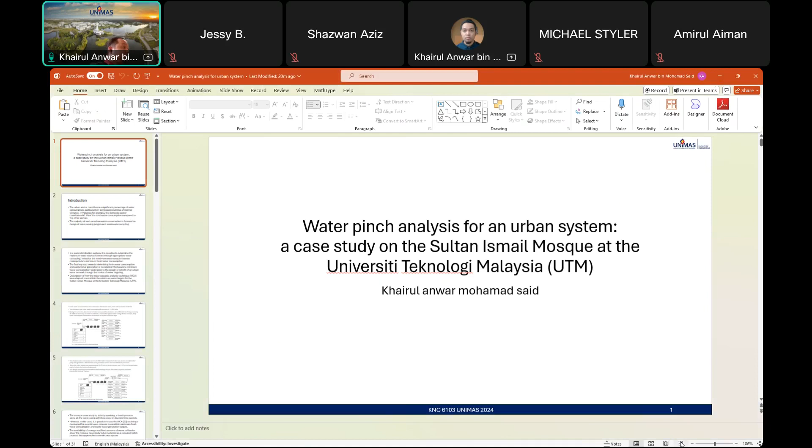The urban sector contributes a significant percentage of consumption, particularly in developed countries with warmer climates. Malaysia, for example, this is from page 2. In Malaysia, for example, the domestic sector contributes 60.1% of total water consumption.

The need for efficient water management in the urban sector is becoming ever more crucial due to a sharp increase in the price of fresh water. This trend is likely to continue in the near future due to predicted shortage of fresh water and hence the possibilities of resorting to wastewater treatment, desalination, groundwater extraction, and water purchases as well as transport.

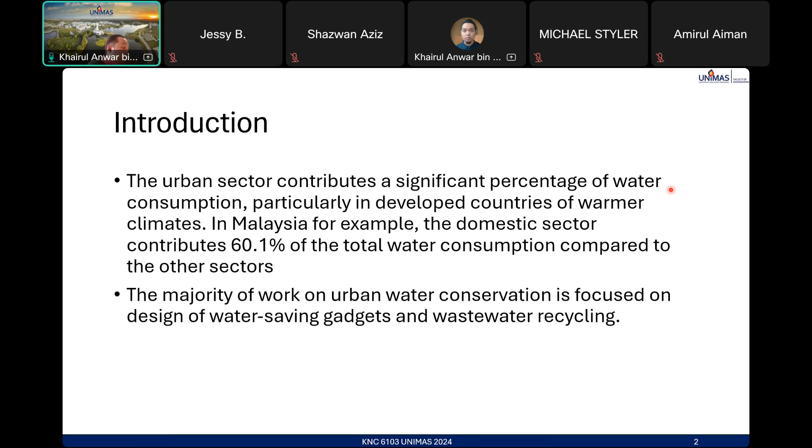So the majority of work on urban water conservation is focused on design of water-saving gadgets and wastewater recycling. In a water distribution system, it is possible to determine the maximum water recycle flow rate through appropriate water cascading, and note that the maximum water recycle flow rate corresponds to minimum fresh water consumption.

The first key step toward minimizing fresh water consumption and wastewater generation is to establish the baseline minimum water consumption target. So the first key step here is actually pinch analysis. We determine the maximum water recovery or minimum water usage.

So as far as our research has revealed, this is the first description of how the water cascade analysis technique was adapted to establish the minimum water targets for the Sultan Ismail Mosque at the Universiti Teknologi Malaysia.

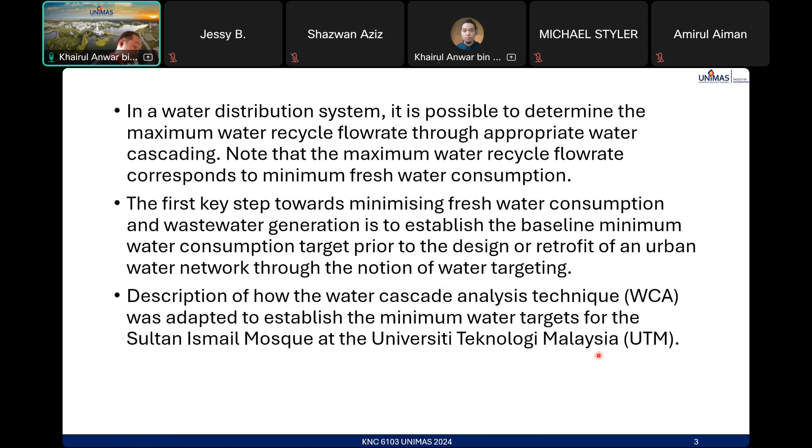They have four tanks to store the fresh water. So fresh water here refers to the municipal tap water. These tanks are arranged in a straight line, so the fresh water will fill up the first tank and overflow into the next tank, into all four tanks. The estimated total freshwater consumption is 11,550 m3 per year. This value you can refer to here.

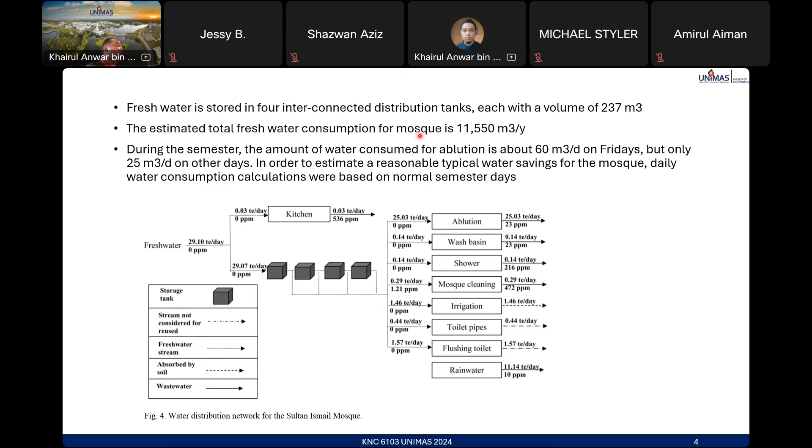So this system is proposed, or retrofitted already, by IEWRM, the Institute of Environmental and Water Resource Management, UTM. So the retrofitted network design: they propose to reuse ablution water, filtered for solid particles like hair, stone, and dirt before going through a series of treatments using activated carbon and microfiltration processes.

Since the water output was approximately 29.07 tons for the four tanks, only 7.27 tons per day of treated water can be fed into the last distribution tank. This design allows an estimated fresh water saving of up to 25% with a payback period for investment of about 10 years.

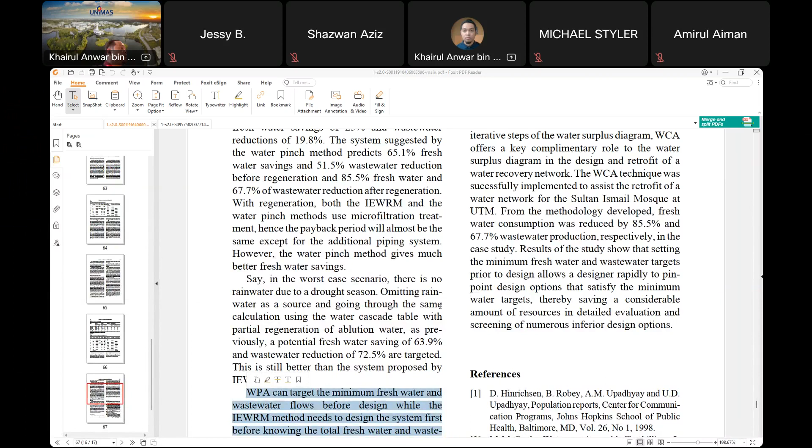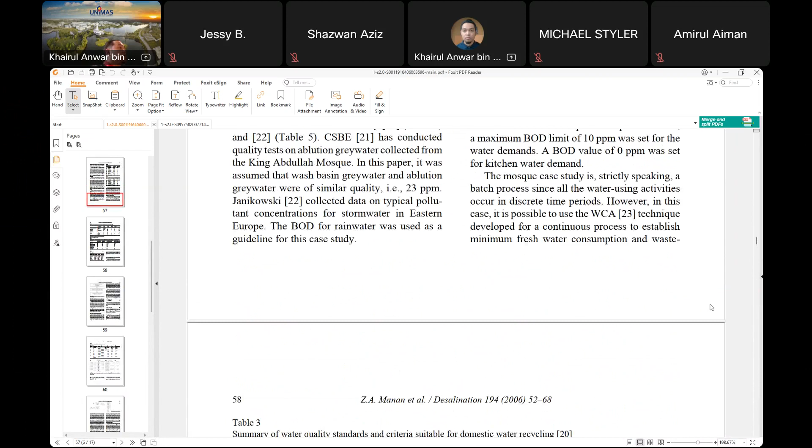Table 3 shows that the US EPA set a conservative water quality standard for BOD level, maximum 10 ppm for non-potable domestic water recycling. Non-potable water refers to water not used for human consumption. That's why in table 1, 10 ppm maximum applies for non-potable water, but for kitchen the BOD concentration will be 0, following the drinking water standard.

So the mosque case study is strictly speaking a batch process, since all water usage occurs in discrete time periods. However, it is possible to use the WCA technique for a continuous process to establish minimum freshwater consumption and wastewater generation targets. The availability of storage and spectrum of water utilization allow the mosque case study to be modeled as a repeated batch process that approaches a continuous system.

Although water in the mosque is mostly used at certain times, since it occurs at stipulated times within one day, one week, they assume it looks like a continuous system.

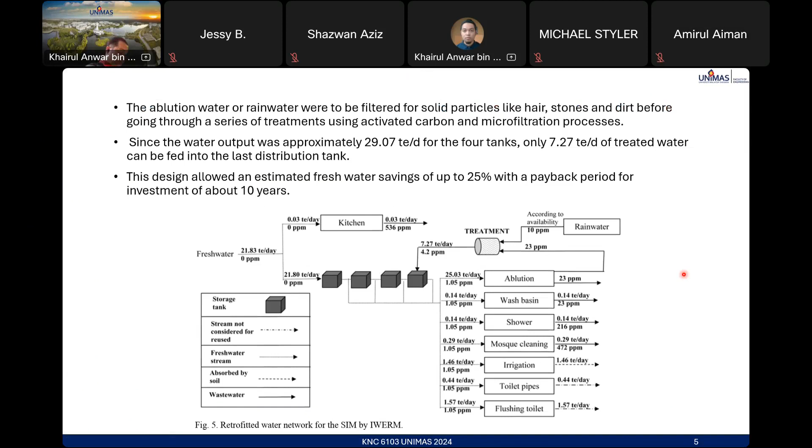First, the total. Now we go to water targeting using WCA, strategy and result of the case study, page 58, page 58, number 5. So you still remember there are 5 steps of the water analysis.

So the first step here is a total building review is carried out to have a good understanding of the plumbing, sanitation and building. Next is the data acquisition and extraction conducted by surveying the water flow rate and potential source discharge. So the second one here is referred to the mass balance. With this data, the process flow diagram of the initial water network can be obtained from step 2.

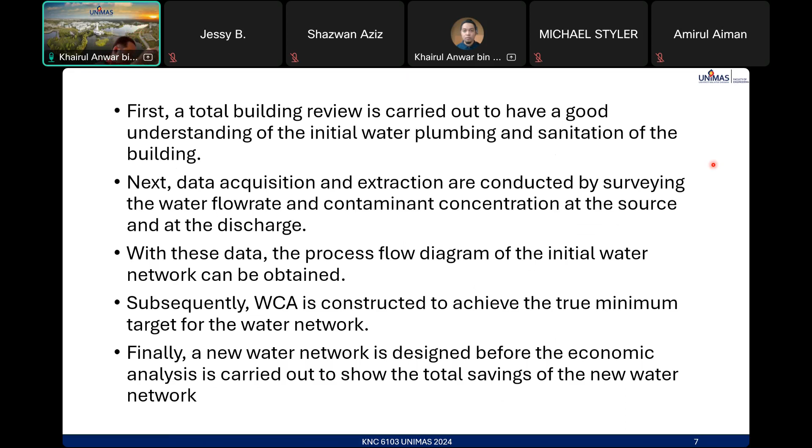So the main objective of the WCA is to establish a minimum water target, the overall fresh water requirement, and the wastewater generation process. So looking at the possibility of using the available resources, we can study the demand.

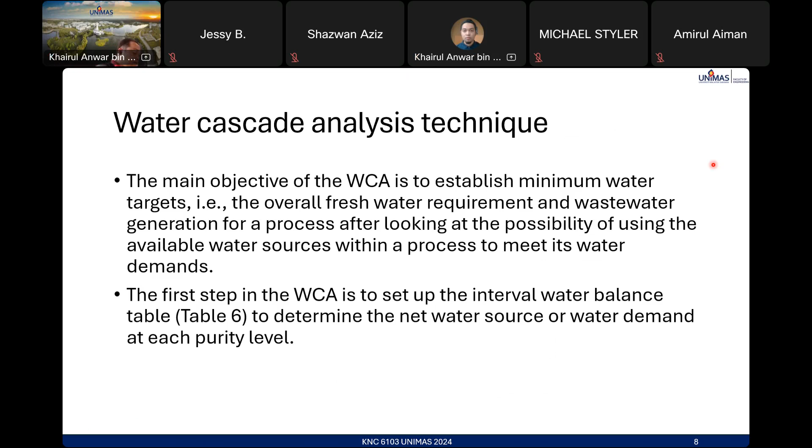To achieve this objective, one has to establish the problem table to see the different water quality levels within the process of the study. The interval water balance table has been introduced for the purpose. The study described the water targeting. The first step in the WCA is to set up the interval water balance table, to determine the net water source or water demand at each level.

So the water source and water demand refer to table 1 and table 2. So how they get table 1, table 2 is from the process flow diagram. So the first column of table 6 contains the contaminant concentration level. This column refers to concentration in ppm. So in ppm, you have many 10 here, 10 ppm for the water demand, water source.

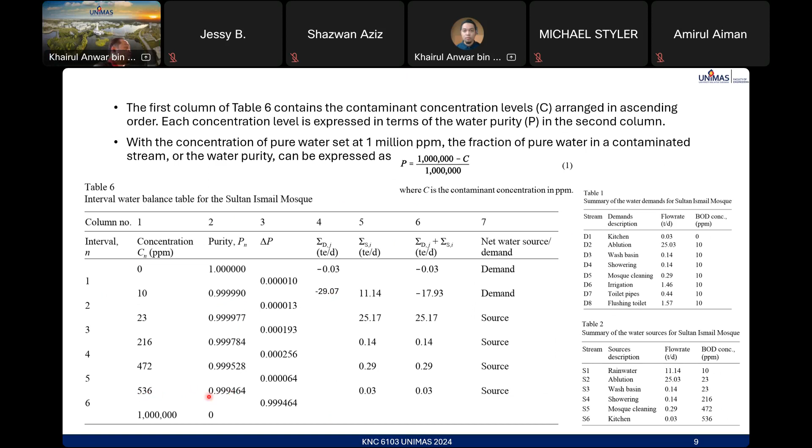For column 1 is concentration, column 2 you need to include purity. Example 1, how to calculate, how you get 1 here. So 1 million minus 0 over 1 million is 1. Example this one, 1 million minus 10 over 1 million, we get 0.99999. This one is 1 million minus 536. The number of purity intervals was the number of water sources.

Application of equation 2 to the case study gives 6 purity levels. Next, the water purity difference in column 3 of table 6, Pn minus Pn plus 1. So the purity difference is between the purity levels. So 1 minus 0.99999 is equal to 0.00001. 0.99999 minus 0.999.

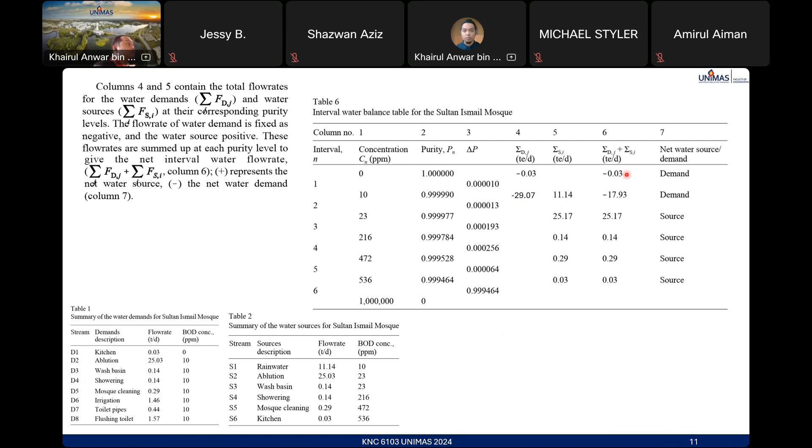For 10 ppm, it's negative 29.07 plus 11.14, then we get negative 17.93. It's negative, so it's a net water demand. And the rest is net water source. So we have the interval water balance table.

So from this interval water balance table 6, we can do the cascade analysis. The next key step in WCA is the cascade analysis, to establish the freshwater and wastewater targets for the process. In doing so, it is important to consider both the water flow rate balance and the concentration driving force, so that the true minimum water target can be obtained.

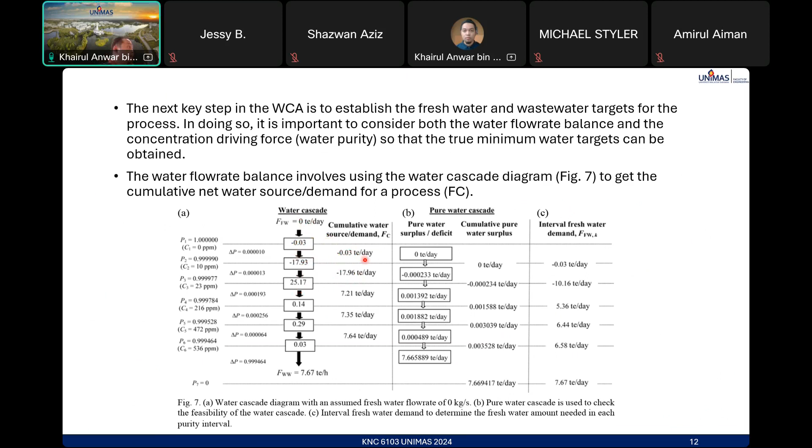Here, the net water demand of 0.03 at the first purity level is cascaded. That's why the word cascading is used. 0.03, so it started here. Okay. Cascaded to the second purity level to meet another water demand of 17.93 ton per day, giving a cumulative net of 17.86 in demand.

This cumulative demand meets the net water source down the next four purity levels to yield a cumulative water source or wastewater flow rate of 7.67 ton per day.

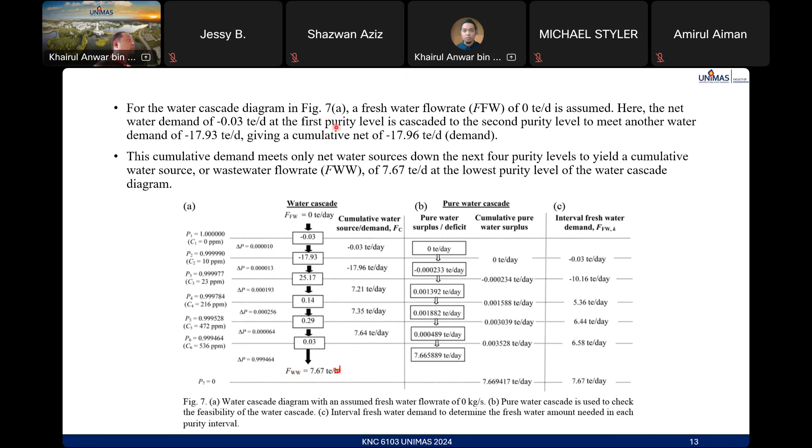So the cumulative net water source or demand, FC, here. Each cascading table forms the water cascade diagram. The water cascade diagram is similar to the problem table. Water cascade diagram depicting the preliminary water balance with fresh water flow rate of 0 ton per day, as a basis to generate the feasible cascade and ultimately the minimum water target.

But again, in addition to considering the flow rate balance, the true minimum target can only be realized by accounting for the pure water surplus or deficit, which is a product of the cumulative net water source across purity levels. So pure water surplus and deficit here, you can see the value.

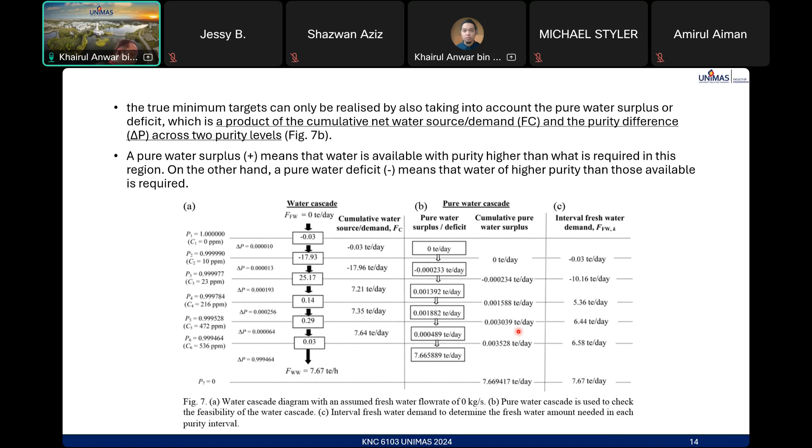But there are some advantages of using water cascade analysis compared to the water surplus diagram. Notice that for pure cascade in figure 7b, cumulative pure water deficit is observed between the second and third purity level here.

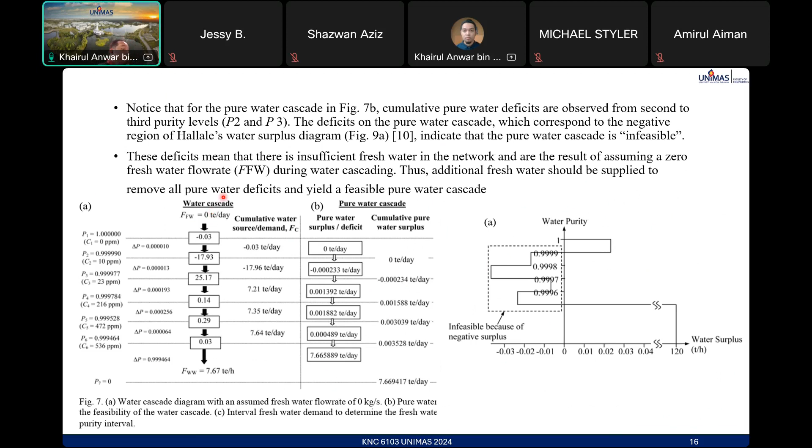For water cascading, additional fresh water should be supplied to remove all pure water deficit and yield a sustained feasible pure water cascade. So fresh or pure water is to be supplied at the highest purity level.

To minimize fresh water, it is necessary to determine the minimum flow rate of fresh water, or the interval fresh water demand, that will satisfy the total requirement at the purity level. The interval fresh water demand restores a feasible pure water cascade throughout the water network.

Figure 7C here is the interval fresh water demand with flow. So the interval fresh water demand, FW K, for each purity level K is obtained by dividing the cumulative pure water surplus/deficit by the purity difference between the fresh water supply PFW and the purity level.

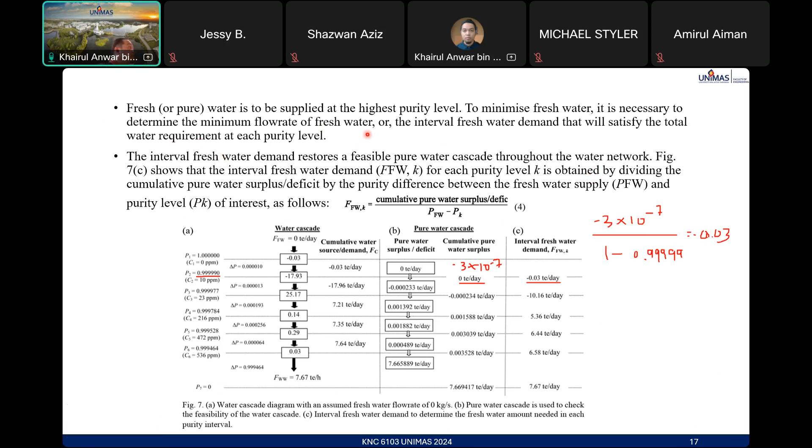In order to ensure that there is sufficient fresh water at all points in the network, a freshwater flow rate of exactly the same magnitude as the absolute value of the largest negative interval freshwater demand, which is 10.16 ton per day, should be supplied at the highest purity level of a feasible water cascade. So meaning we will use this value, adding it as the FFW, the freshwater flow rate.

So the FFW4, this one, 4, FW of 10.16, 3, is found at the third purity level P3 of the cumulative freshwater cascade in figure 7C, as the largest negative interval freshwater demand. So this quantity of freshwater is at the highest purity level of the feasible water cascade in figure 10.

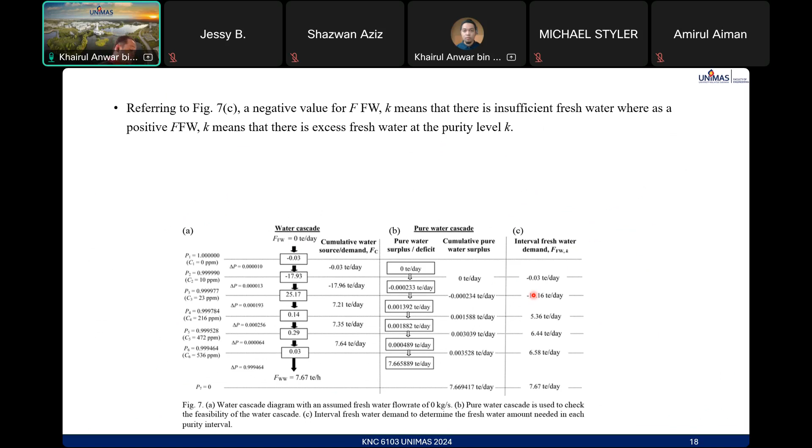You notice here, the 10.16 ton per day is the freshwater input for this system, and automatically the largest negative turns to pinch or zero. So note that the feasible water cascade is the one that results in positive, this 0.3, it's a plus in the water cascade.

So the minimum water cascade analysis through minimal fresh water flow rate FW and wastewater flow rate FWW target: 10.16 ton per day and 17 ton per day. Compared to before the pinch, 0 ton per day, wastewater produced was 7.6 ton per day. After the freshwater feed at the highest purity level here, the amount of wastewater increased to 17.83 ton per day.

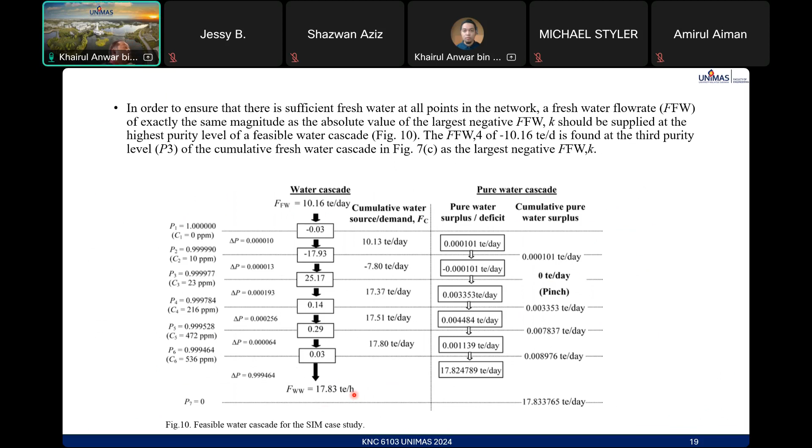Note that through the WCA we have obtained the utility target ahead of design and are able to verify whether the proposed initial design achieved the maximum water recovery objective for this plant, for this mosque.

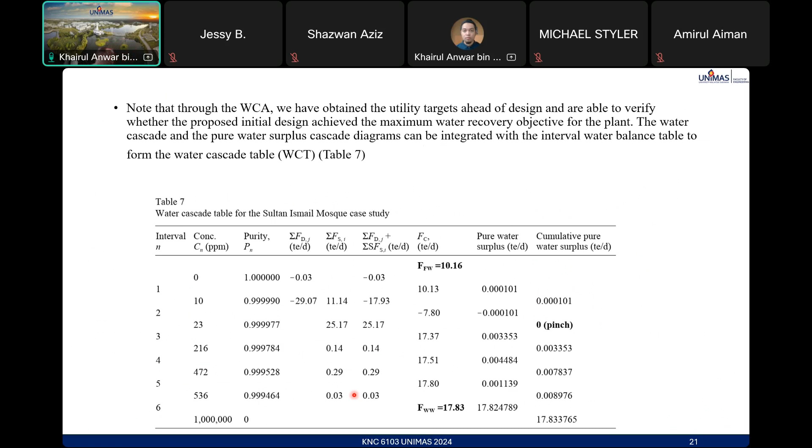The water cascade and pure water surplus cascade diagram can be integrated with the interval water balance table to form the WCT, water cascade table.

The WCA technique offers two key advantages over the water surplus diagram, which is the graph proposed by Hallale. In realizing the minimum water target, apart from the power to eliminate the tedious iterative step of water surplus diagram, it can reveal the exact utility target in each location quickly.

So the first key advantage of WCT, the water cascade table, is that it clearly displays both the minimum freshwater and wastewater flow rate. So you can determine the freshwater FW and wastewater from the water cascade.

In the cumulative net water source demand column, you see this one. Note that in the case of the water surplus diagram, only the minimum freshwater target is known. However, the value of the minimum wastewater flow rate target is not available from the diagram.

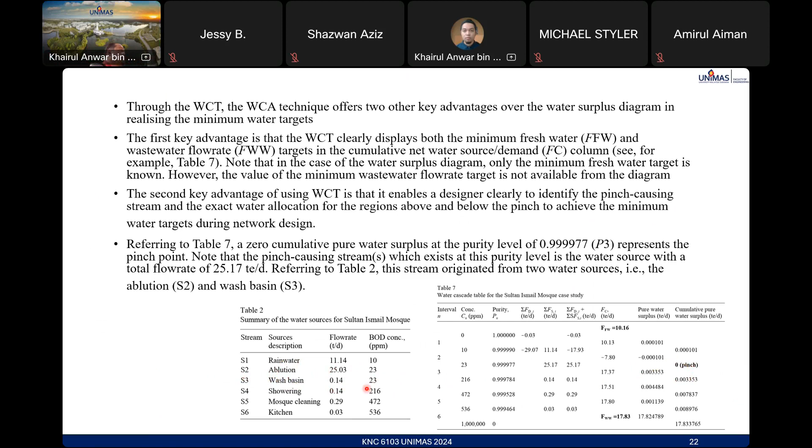So from here, you can actually identify which source is the pinch. So in order to realize the pinch point and achieve the maximum water recovery objective, a portion of the pinch causing source stream, in this case the ablution and wash basin, has to be allocated to the process above the pinch.

So this value here should be treated above the pinch, while the rest goes to a process below the pinch during design. The exact water allocation is available from the WCT.

Referring to the cumulative net water source column of table 7, out of 25.17 ton per day, water source contribution was seen as 7.8 ton per day here, of water found between P2 and P3 must be sent to the region above the pinch.

Negative signs indicate sending water across driving force. On the other hand, 17.37 below the pinch must be sent to the region below the pinch.

So FC here is a cumulative water.

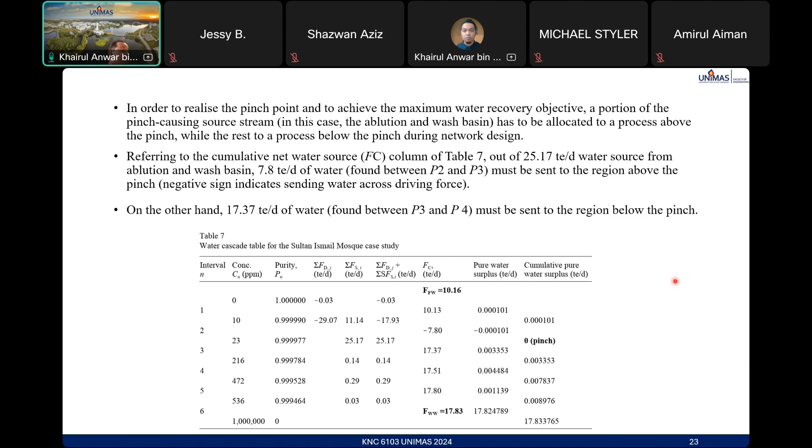The red one is for water pinch, or maximum water recovery objective, without water regeneration. So now we go to water regeneration using WCA, water cascade analysis.

Until now, I haven't given any final example with the regeneration. It's not just to determine the minimum recovery.

So there are two possible scopes for process changes to reduce the water target further. Hence, water consumption includes water regeneration.

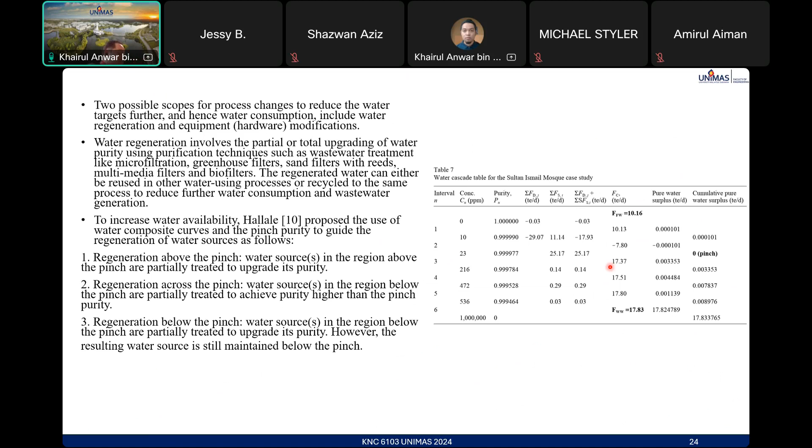So regeneration above and across the pinch gives us three regeneration targets. Regeneration above and across the pinch will reduce both fresh water consumption and wastewater generation, while regenerating below the pinch will only reduce wastewater generation.

The main problem of dealing with process changes is that assessment of the impact involves the repetitive ability to revise the utility target and relocate the pinch. Such tasks can be quite cumbersome, due to the absence of efficient targeting tools.

WCA has managed to overcome this problem through the introduction of the WCT. It's very recommendable.

So table 7 shows the pinch concentration for the mosque process located at 23 ppm. Only this line, 23 ppm.

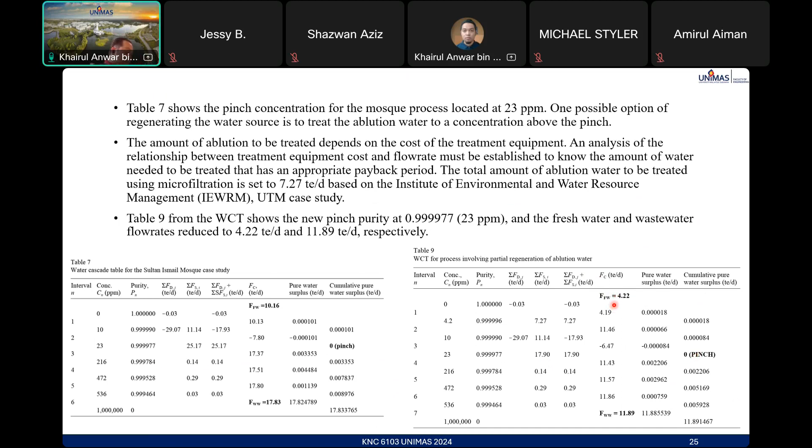So designing a network that reuses wastewater is needed due to the shortage of fresh water and rising cost of wastewater treatment. Reusing, regenerating, and regeneration and reuse of wastewater reduce freshwater consumption and reduce wastewater generation. The wastewater can be reused directly in other water-using operations.

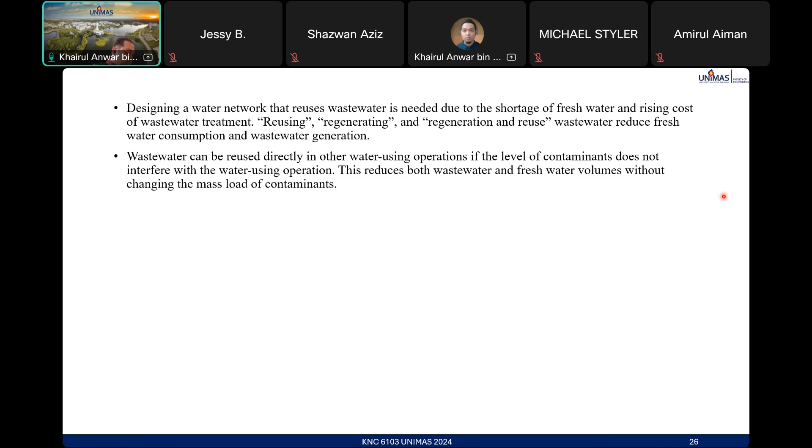Just simply optimizing the water to determine the exact amount of fresh water needed for the system. But after the regeneration, by installing the microfiltration, the water saving for fresh water is up to 85.5% and 67% of wastewater reduction, which is very significant by combining regeneration with water pinch analysis.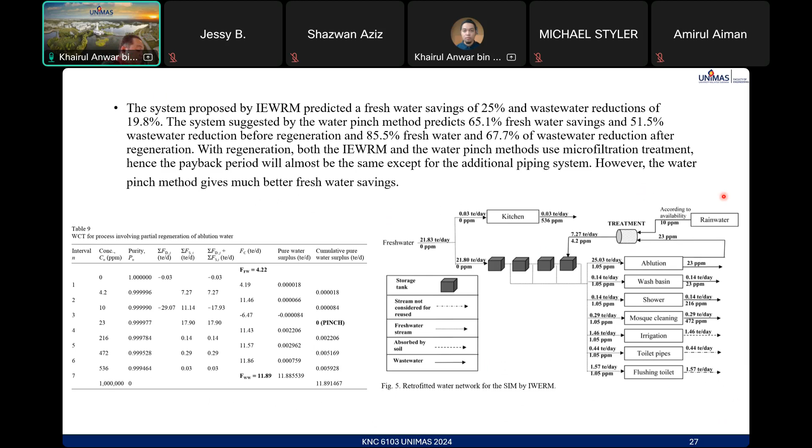Amount of wastewater, what fresh water saving is a lot. So with regeneration, both the IEWRM and water pinch method use microfiltration treatment. So meaning the payback period will almost be the same, except for the additional piping system. However, the water pinch method gives much better fresh water saving.

So in the worst case scenario, there is no rainwater due to drought season. So omitting rainwater as a source and going through the same calculation using the water cascade table with partial regeneration of ablution water as previously, a potential water saving of 63.9% and wastewater reduction of 72.5% are targeted. It's still better than the system proposed by IEWRM.

So WPA, water pinch analysis, can target the minimum fresh water and wastewater flow rate before design, while the IEWRM method needs to design first before knowing the total fresh water and wastewater saving. This is the difference between doing the pinch and directly designing.

So with WPA, one can efficiently and systematically plan savings, able to identify inferior design options, knowing the target and maximum potential saving design, in order to determine the best possible design that can be the most effective. So without this design target, the designer is unaware of the potential saving until recycling.

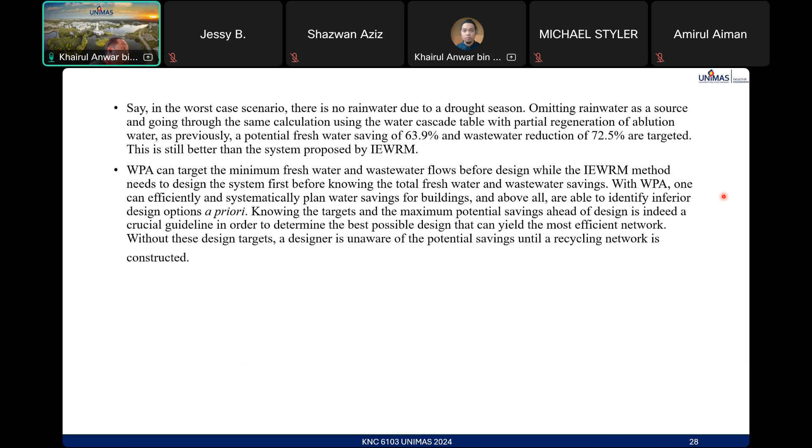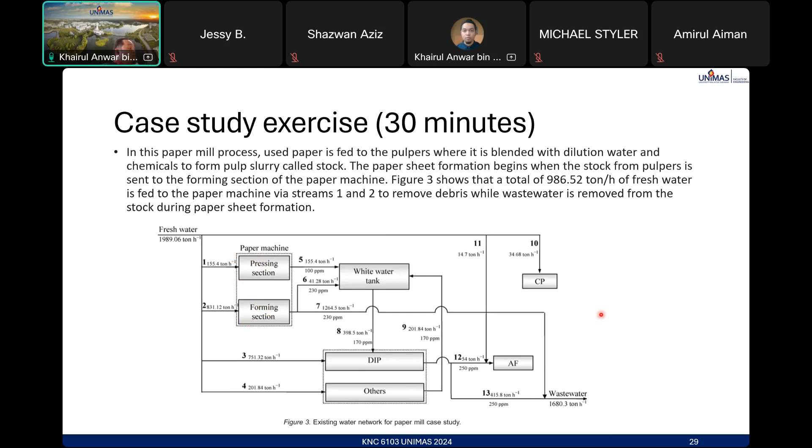We remove the debris while the water is removed from the stock. Gradually, the sheet production. So we have pressing and forming the paper sheet. So part of this water source, see here the term water source, 5 and 6, and then along with the recycled water, 9 here. From other process in the de-inking pulper

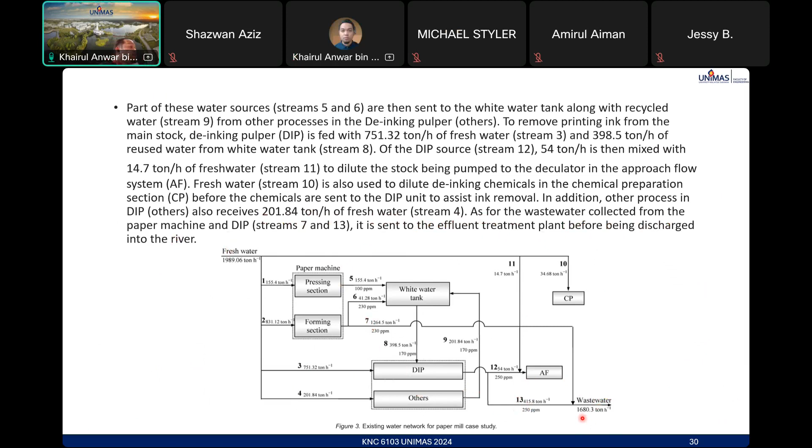assist ink removal. In addition, other process in DIP, others here, also received 201.84 tons of freshwater. As for wastewater collected from the paper machine and DIP and to the effluent treatment before being discharged, so wastewater is 1680 tons per hour. So this is the table showing water demand associated with this case study. This is the water network.

To calculate the minimum water target for the paper mill using the water cascade analysis. So your task is to construct tables. Now you have the data for the demand and source. If there is no table 1 here, you need to extract it from here. Now you need to construct the interval water balance tables. You refer to table 6 in paper number 5.

We have seven columns. First one is the interval. So determine the interval first. To determine the interval, you refer to how many concentrations without the duplicate. How many concentrations, then you know the level. Then you arrange the concentration in ascending order in the table, from 0 to the highest ppm. Calculate the purity, delta P, determine the summation of demand and source, and determine the total of demand and source. You do that for 10 minutes first, then we check again.

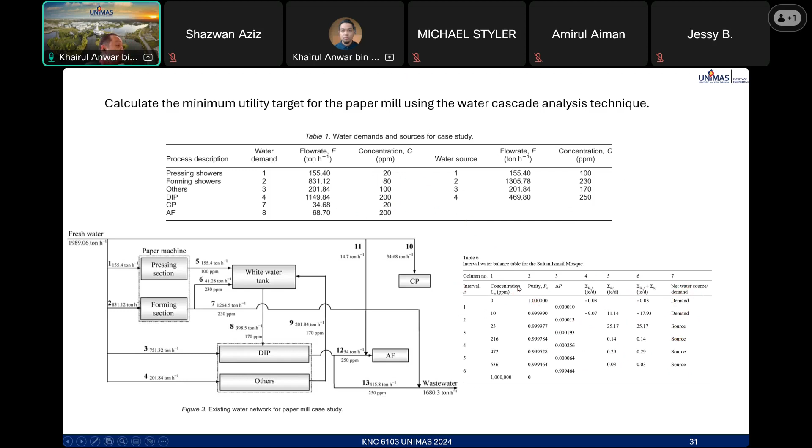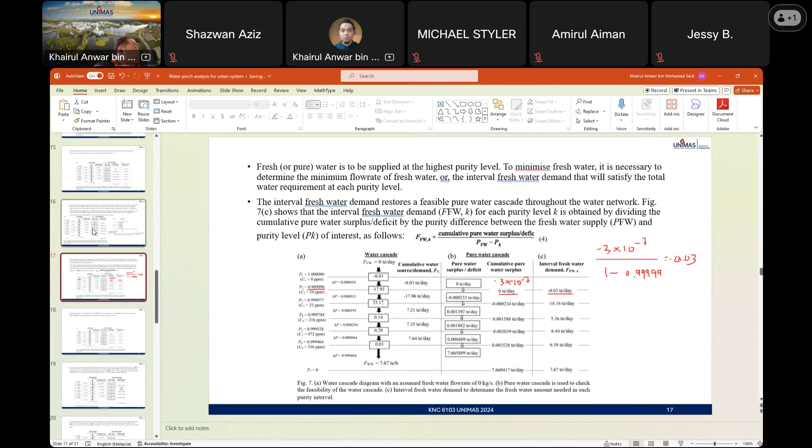So for cascading, you start with zero fresh water cascading. So for zero fresh water, based on the summation of demand and source, cascade it to get the cumulative water source for demand, FC. So the interval water balance is one table. Meanwhile, water cascade is one table starting from zero fresh water. So once you do this, you calculate the pure water surplus or pure water deficit.

So to calculate pure water surplus or deficit, pure water surplus or deficit here is calculated by multiplication of the cumulative net water source, FC. So FC times delta P. In this case, delta P is the purity difference. So example here, 0 ton per day is calculated by -0.03 times delta P. It's not 0, we discussed this already.

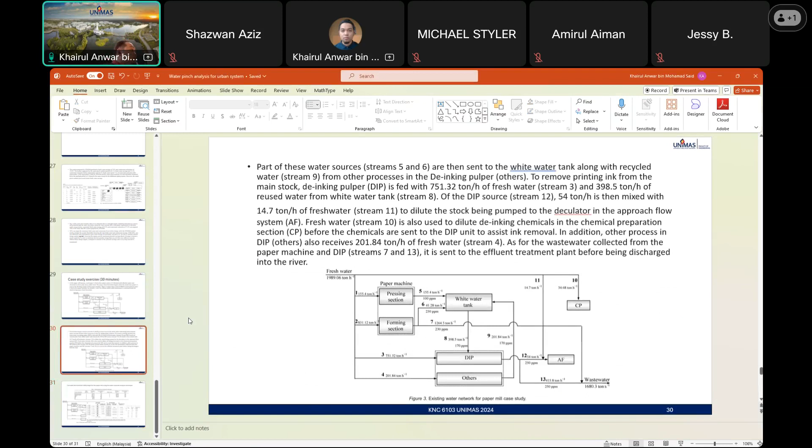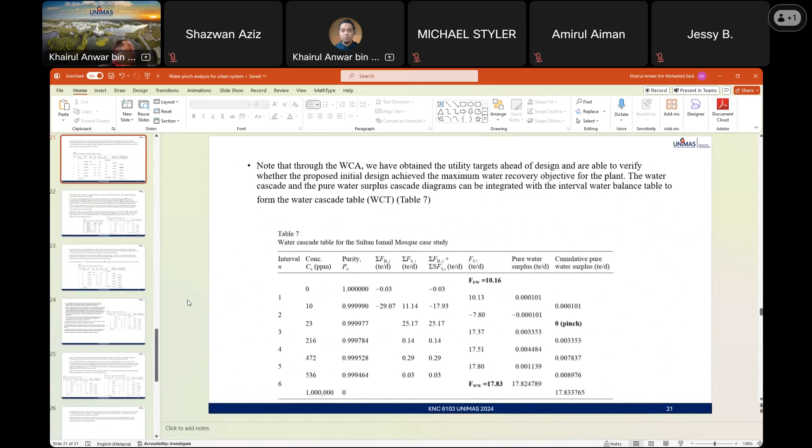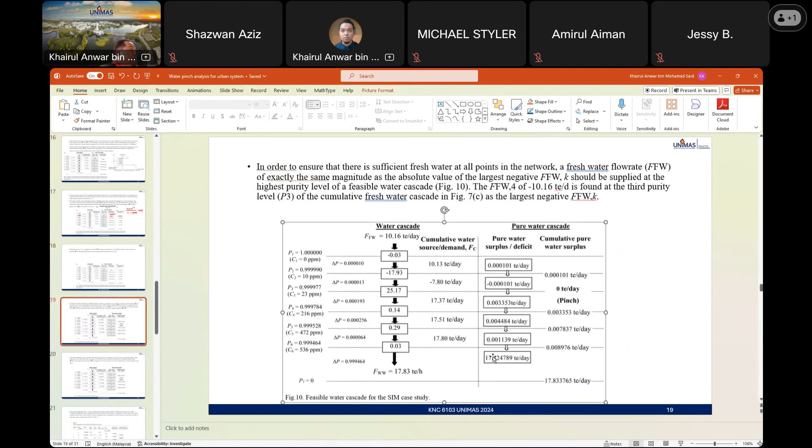Okay, next, once you determine the pinch, you need to recalculate using the pinch point as the freshwater supply, freshwater flow rate, for a new water cascade. So a new water cascade, with the cumulative water surplus equal to 0 at the pinch. But before you can get this pure water cascade, you need to calculate this one, cumulative water source or demand, FC.

So by using the pinch that you obtain from the paper mill water cascade table, you do the cumulative cascading, determine the new wastewater flow rate, determine the pure surplus or deficit using the same equation. Then you get the pinch. So once you identify the pinch, that is the minimum utility target for the water cascade system. So you have at least 3 tables.

But if the question asks you to do water regeneration, with some sort of... yes, it should be zero. Should be zero. I'm not sure about what Dr. Farid is doing. Cascade analysis.

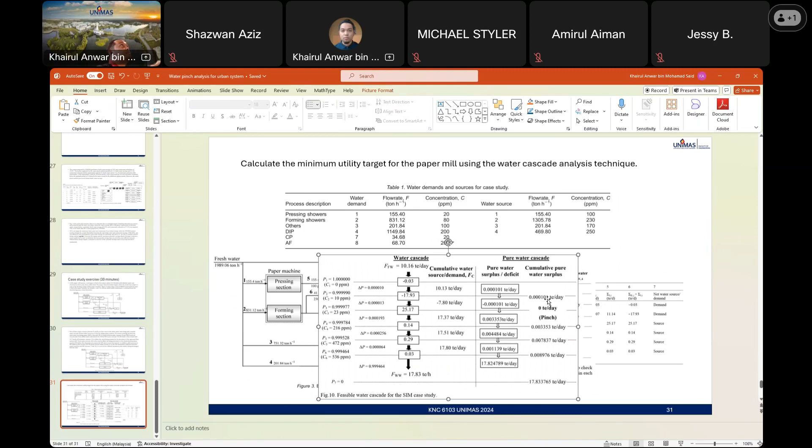So from pinch here, let's say the question is asking for regeneration, meaning we need to determine which stream you need to regenerate. Either above the pinch, on the pinch itself, or below the pinch. How to know that? Normally you will be given each stream to focus on.

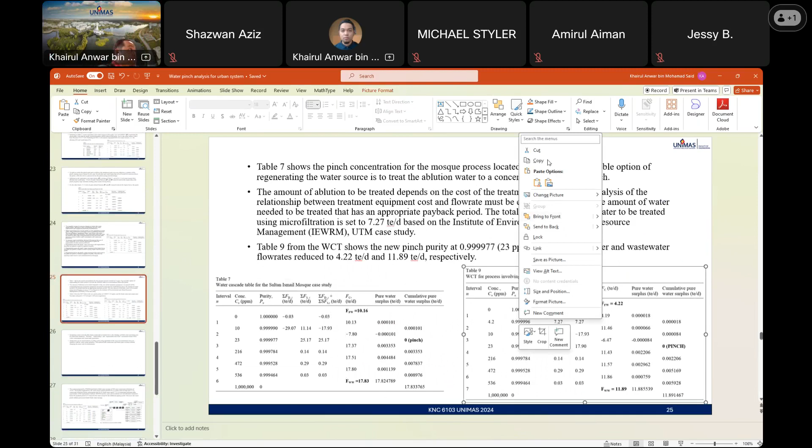By doing that, you need to recalculate another water cascade using zero fresh water, but with a new stream. For example, this one, a new stream with regenerated water. So once you have regenerated water, the water source from where you regenerate it must be reduced. Reduced.

So with FFW equal to 0 the first time you calculate after the regeneration, in order to determine the pinch. Once you determine the pinch, you need to recalculate the water cascade table again to get the actual fresh water supply needed and how much the wastewater is reduced. So without the regeneration, you have three tables. With the regeneration, you add two tables, five tables total.

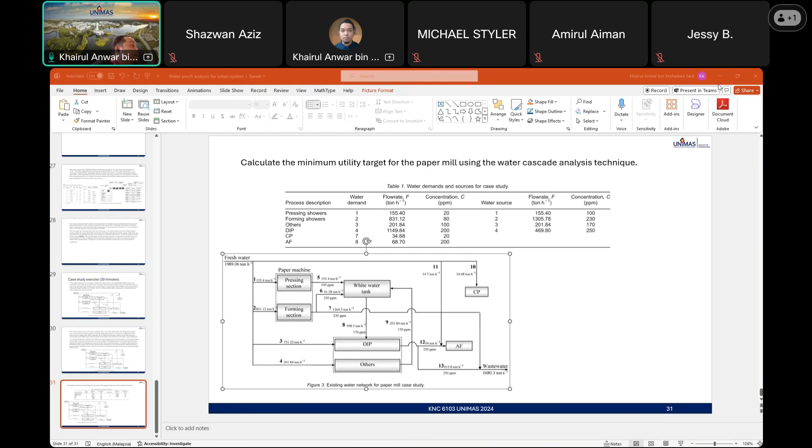So step analysis with regeneration. Yes. For this example, the answer is zero. This is the answer. So wait, see the interval here, 1, 2, 3, 4, 5, 6, 7, 8, 10. This is the concentration. Start with 1. You calculate the rating.

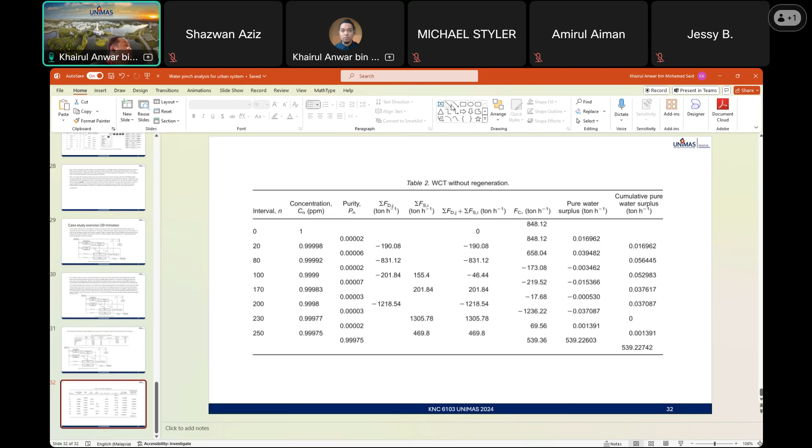This is a bit different. Okay. For the concentration here, it actually should be in ppm. If you see the value like this, it's actually a purity. So in this case, sorry, just here, they made some mistake. What should be the purity? This one should be the top purity.

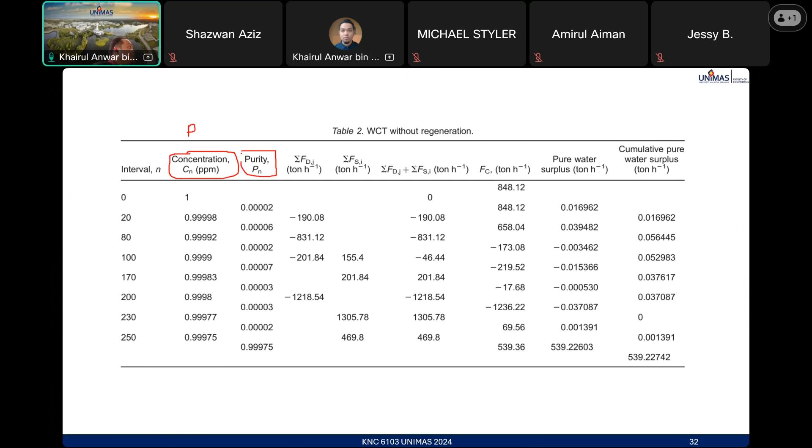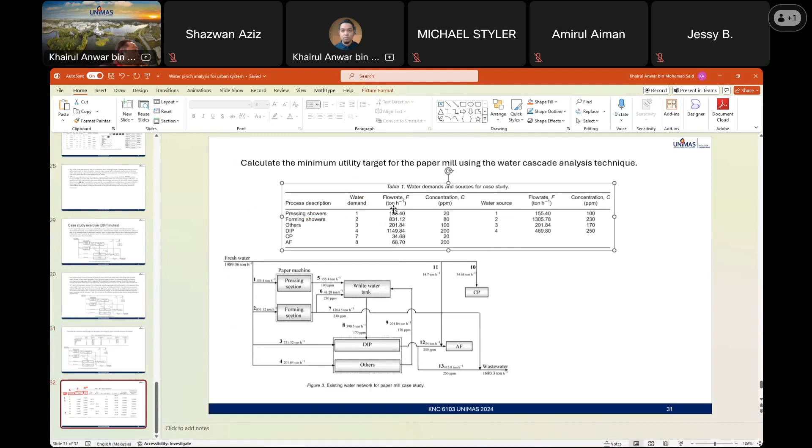Normally, the interval here is actually the concentration. See, the interval is here. Look, so we pick the concentration. Then we determine the demand and source.

So for the demand and source here, for example, 20 ppm, demand we have 155.40 plus 34.68, so we get 190.08. For 80 ppm, only one, so 831. Don't forget the negative for demand. And for the source, it's straightforward. There's no duplicate. So we have 4 values. Then do the summation for demand and source.

So for the first one, there's no zero. Unlike the mosque case study, where you have 0 ppm for the kitchen. This one, no. Paper mill, there's no 0 ppm. Okay. So the demand is 0. When you come up with this, it's actually negative 201 plus 155. Yes. So they already found out the pinch now.